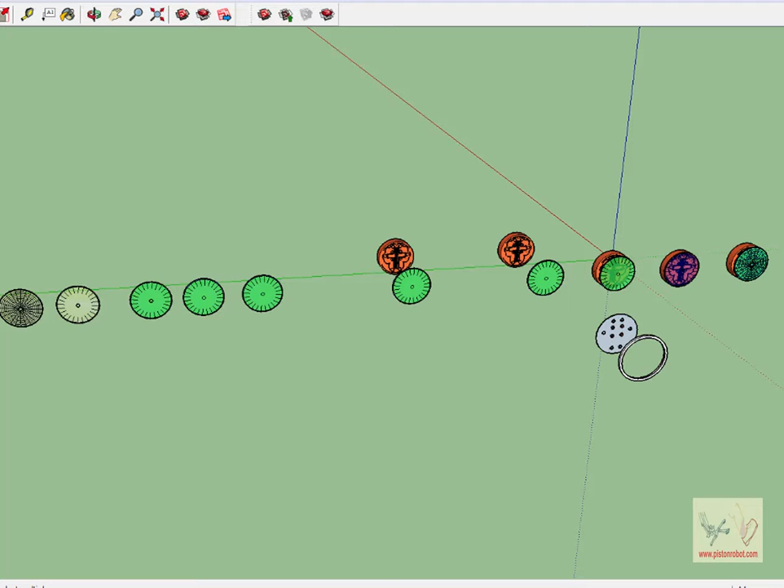So we've backed away a little bit on our drawing to show all of the different features of the drawing that we're talking about. On this side of the drawing is all the treatments that we did to the lens to bring it up into a configuration where it's easy to visualize.

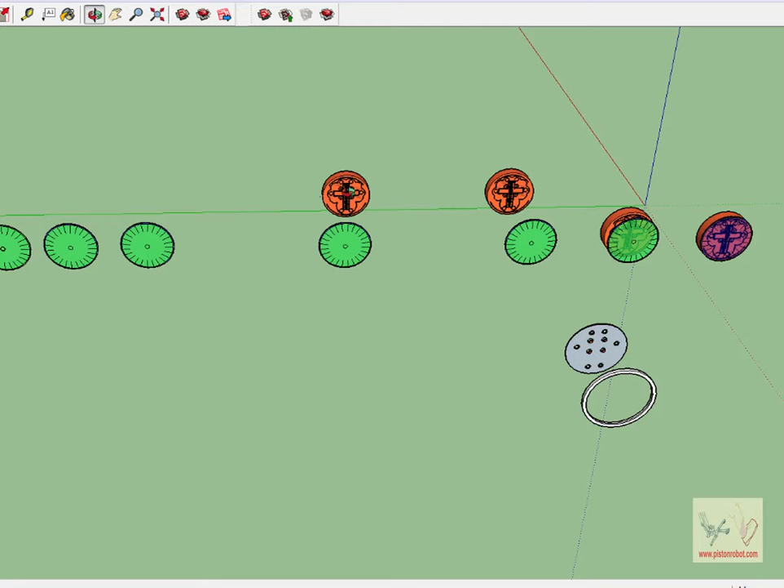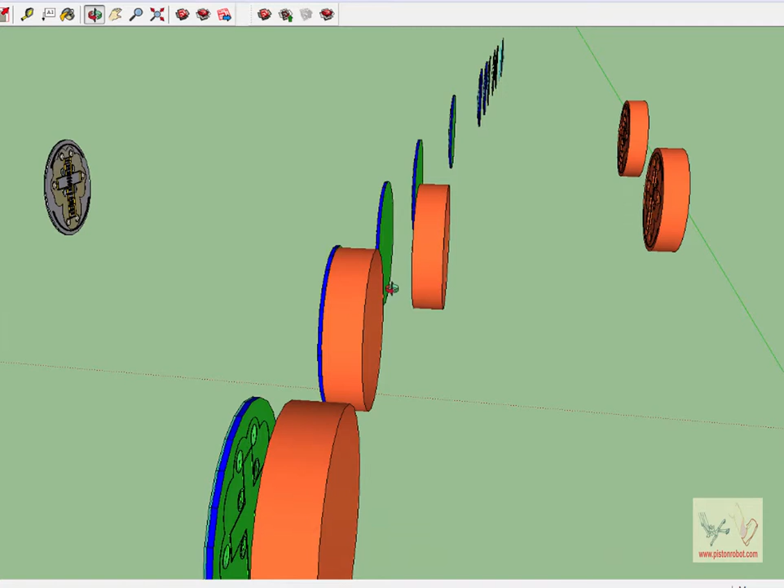This is where we've described the boron nitride structure. It's basically a die—like a type of printing or stamping where this boron nitride die will be pushed into the back of this sapphire lens or sapphire cover. We're showing the boron nitride die coming closer and closer to the sapphire, and at this point the boron nitride die has been pushed into the back of the sapphire cover.

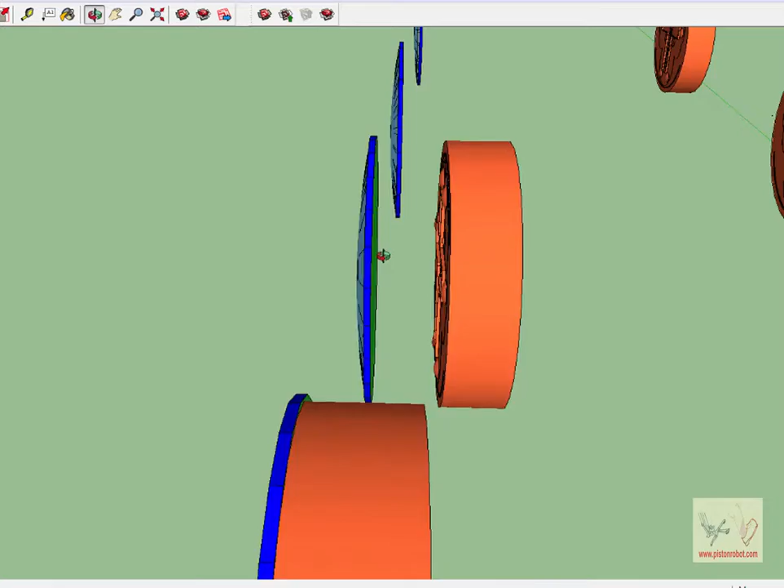This process that we're describing takes advantage of a feature of many materials—most ceramics, most glasses, most metals actually. It involves what is called the brittle ductile curve. It is a curve of the amount of brittleness, which is the rigidity and stiffness of a material, compared to its ductility, which is its ability to be pushed and formed and stretched.

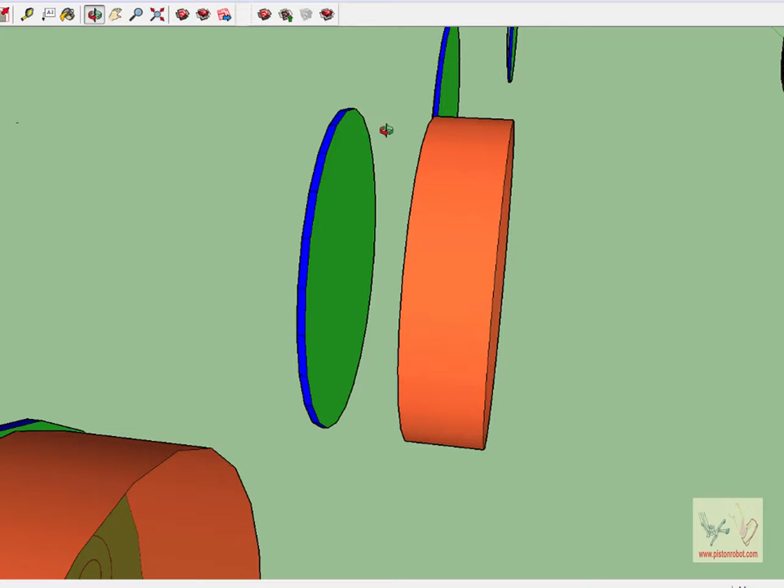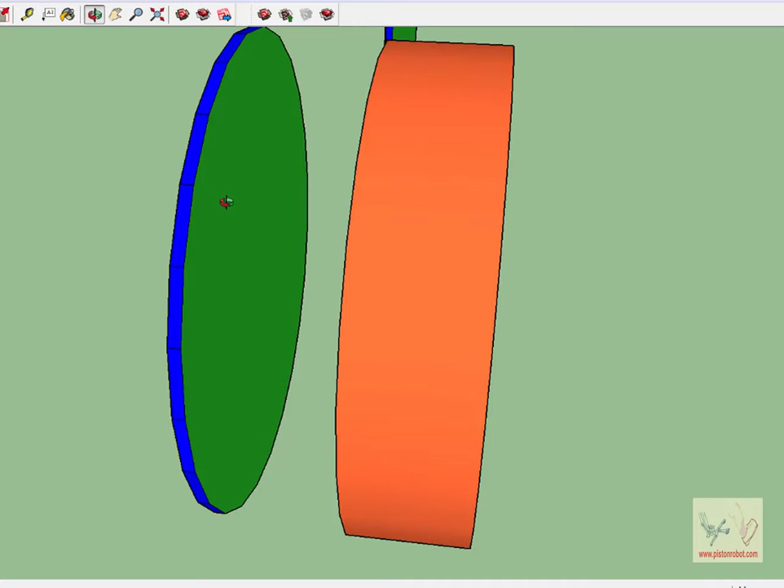For most materials, there is a temperature where they change from being a brittle material into a ductile material. So if we took a metal object like this boron nitride metal die and pushed it into sapphire, which is a type of ceramic, the sapphire would shatter or crack or break apart, because the sapphire is brittle—it's a ceramic glass.

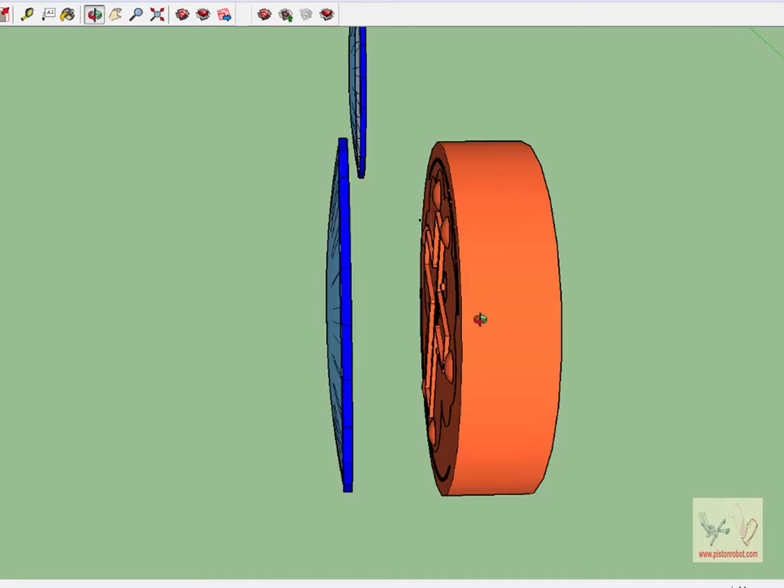However, as we heat the sapphire up, it becomes softer and softer. The temperature transition for sapphire, where it changes from being brittle to being ductile, is 1500 degrees centigrade. So if we held this sapphire lens at 1500 degrees centigrade and had this boron nitride die at a temperature near that, then when we push the boron nitride die against the planar flat back surface of this sapphire cover, what would happen is you would stamp into the sapphire the size and shape configurations that have been put into this boron nitride die face.

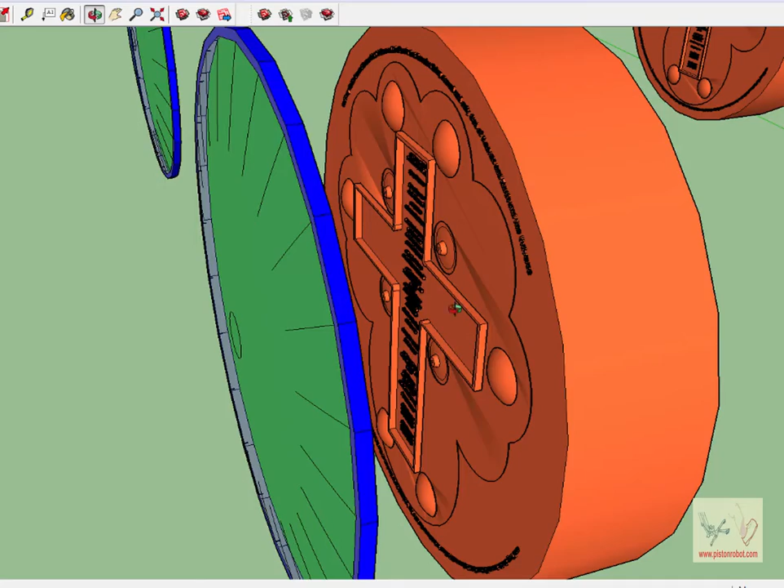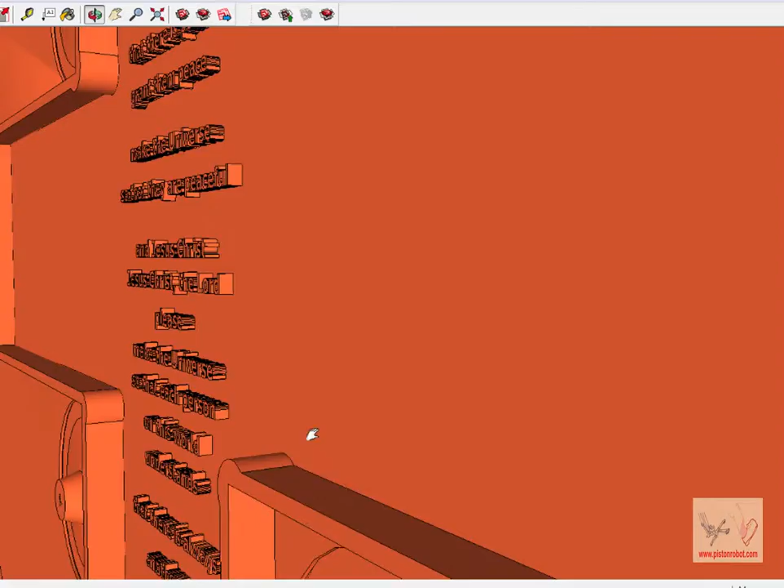I should mention that originally the thought was that this boron nitride structure would actually be a boron nitride printing of the letters and the cross and the shaped structures that hold the gemstones. But as I more carefully investigate 3D printing with boron nitride, it's not so clear that that can be done.

However, this is a printing that's easily done with titanium, and you can then take a plasma jet and just plasma deposit boron nitride onto the titanium metal structure.

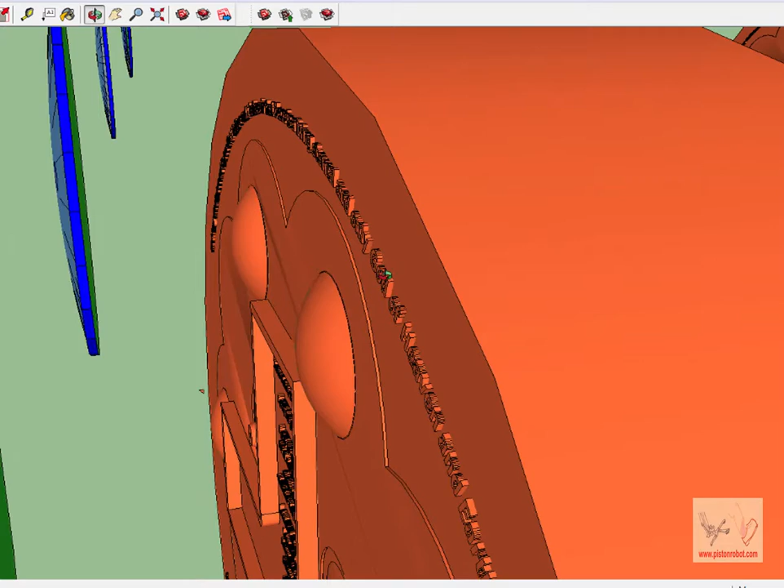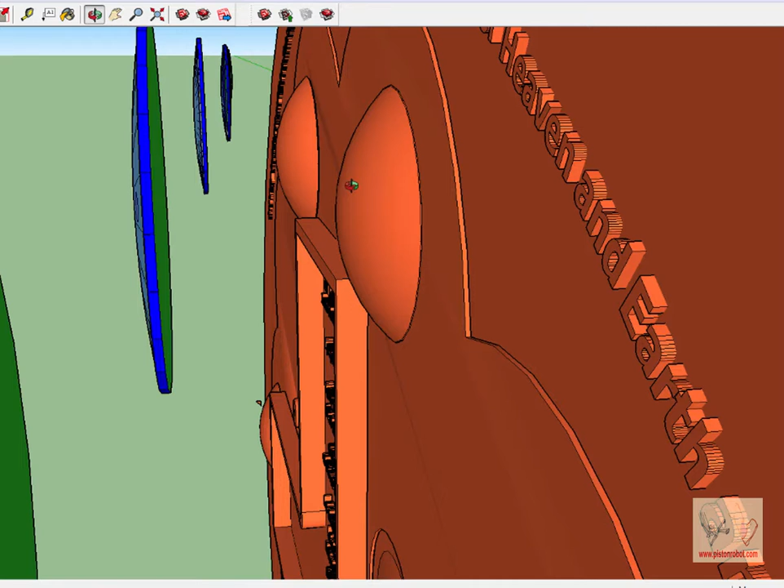The important purpose of boron nitride in this situation is that it's used as a mold agent or release agent, because boron nitride coated surfaces don't need to be solid boron nitride—it would work just as well if this was a solid surface coated with boron nitride. When you take boron nitride and press it into the back of a ceramic material and then pull it back, it doesn't stick to the ceramic material.

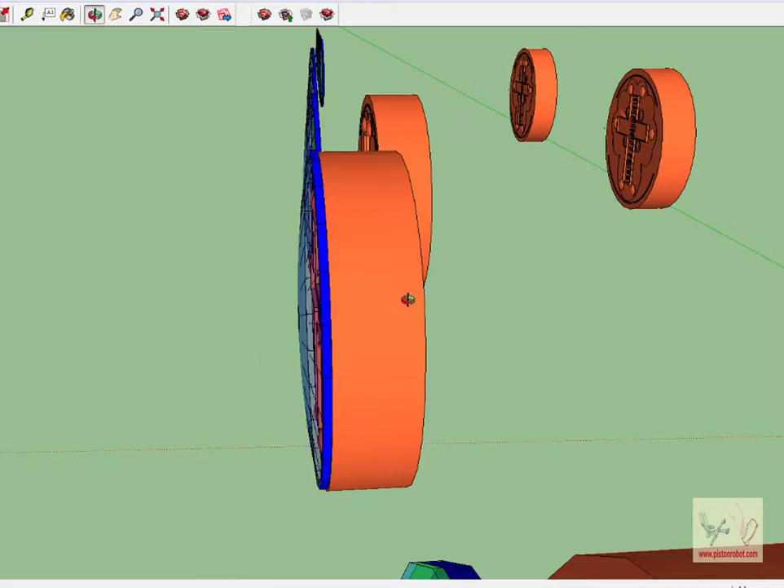We can now show that we have taken this boron nitride die face, or boron nitride coated die face, and we've pushed it into the sapphire cover lens. My thought would be that this sapphire would be at 1500 degrees C and this boron nitride die face would be at 1300 degrees C. That this boron die printing activity would occur in an oven at 1300 degrees C.